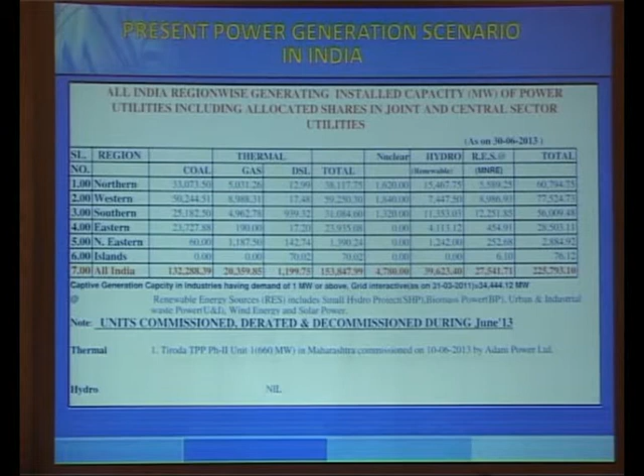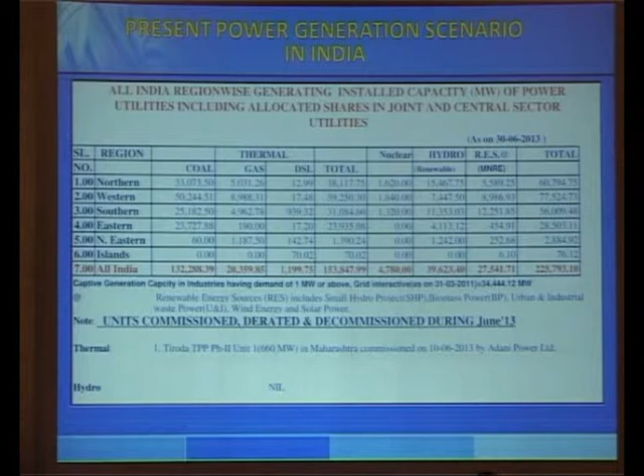That's the present power generation scenario of India. As you can see, this has been completely downloaded from the net. I will talk a little more over here. Once we just look at the total of thermal, all right? Now, if you take a look at that—and we did see in this particular thing, it becomes much more important.

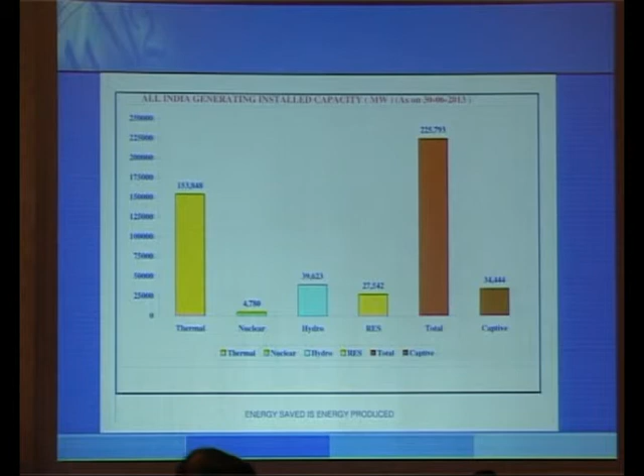Now, although our Shondipan Chakraborty, our speaker in the earlier session, talked about how renewables would probably try and replace non-renewables by the year 2030, I would tend to agree. We had a discussion over lunch—Arunda was there. I would like to agree more with what Mr. Alok Mukherjee had to say.

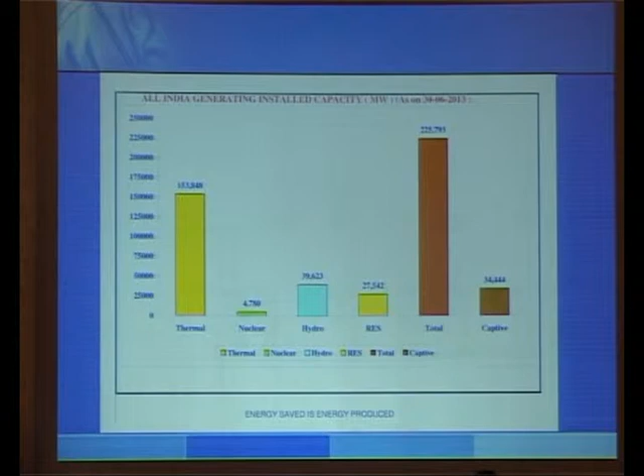If you look at this—this is not my statistic at all—this is the All India generating installed capacity as of current, 30/6/2013 is the date. And can you see the bars? This is thermal. The only additive I am adding here is that 90% of this is that great thing: coal. 90%.

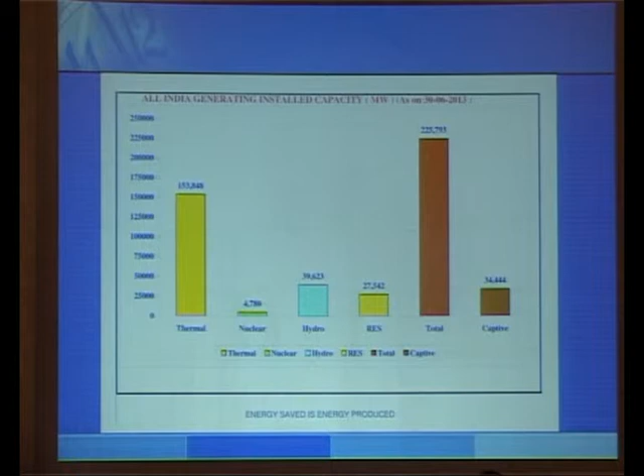And look at the others. This is stark reality. This is reality. And if we are going to dream of a utopia, neglecting this reality, then I think we are going to go wrong right at the very beginning. Yes, this needs to be enhanced. This needs to be enhanced. Oh, I don't know about this—Germany has banned this. This certainly needs to be enhanced, but this is reality, sirs, madam. So let's keep this in mind as we go forward. Otherwise, we will be skewed right from the very beginning. We cannot do away with coal, for God's sake. And we cannot do away with thermal, if you're in India.

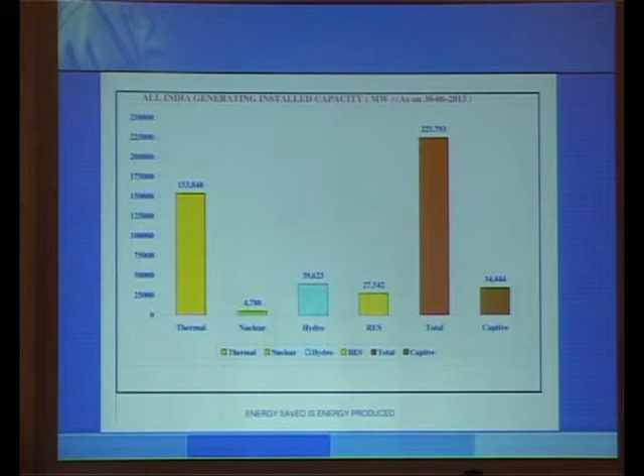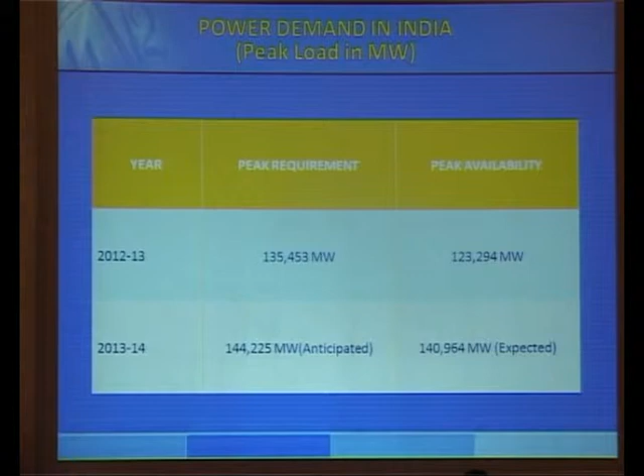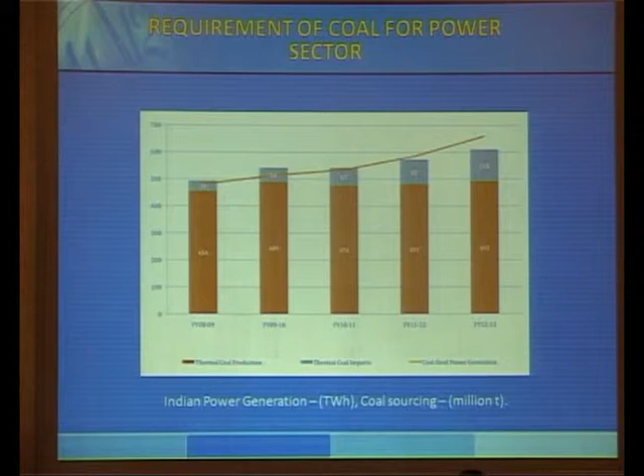I don't know why the Almighty really designed it in this manner, but it's true for India. Unfortunately, most of our rich mineral deposits are overlain by the richest of forests. It's true across many, many places and states of India. I may just want to pick out 2 of the 3 M's - Madhya Pradesh, Meghalaya.

This makes advanced technology as regards mining - I'm just stressing mining for a moment since I'm talking about reserves here of coal - it makes it imperative that we get into advanced technology as far as mining is concerned, principally underground mining. Because if you go in for open cast, you will be denuding the very rich medicinal forests at many places in Madhya Pradesh as well as Meghalaya if you want to extract the mineral below.

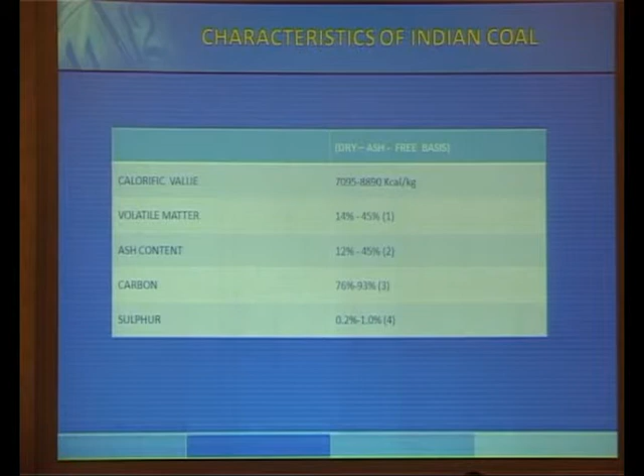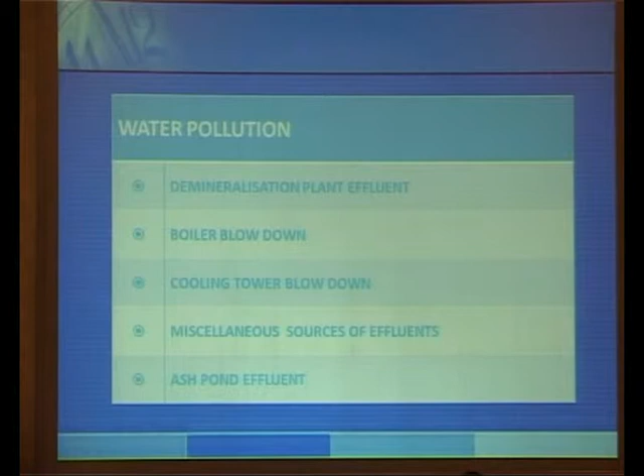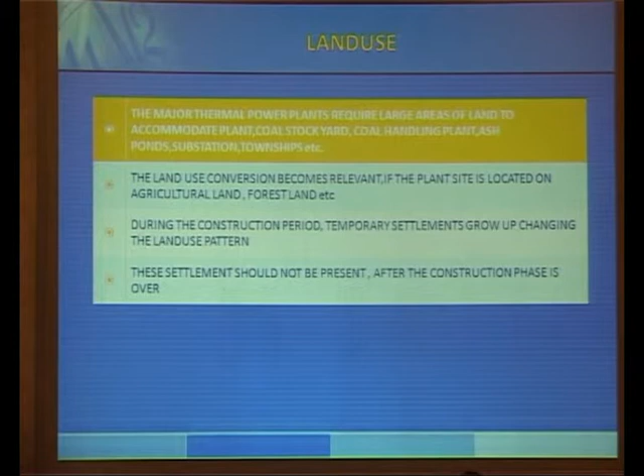Just a few major areas of impact that thermal power plants have on the environment. The land environment certainly gets disturbed. If it does, particularly for greenfield projects, then up comes rehabilitation and resettlement issues, which I think, in my book at least, takes the highest importance of all cardinal environmental parameters. Because here you're dealing with humans. It's as simple as that.

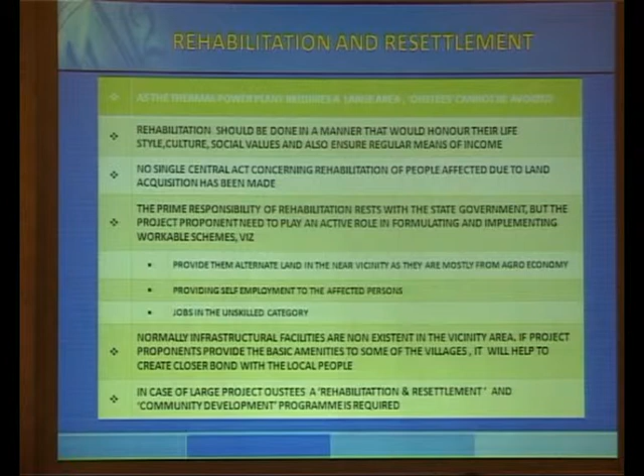I know of cases in large areas of power development where one family has been evicted 6 times. So poor has been the R&R plan.

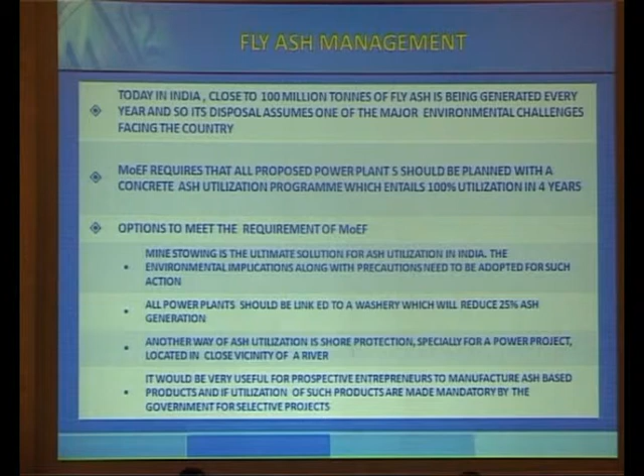We produce about 100 million tons of fly ash. We all know that we now have 100% utilization to be done in 4 years, as is the MOEF requirement. But I think all of you would agree we are far, far away from it. And if you ask me, this probably is the single most environmental problem that we face, at least in India today, with reality facing us - coal and its 45% ash and the fly ash it produces.

Mr. Mukherjee just mentioned that we are very adept in making policies, but very inept at implementing them. This probably is one such area.

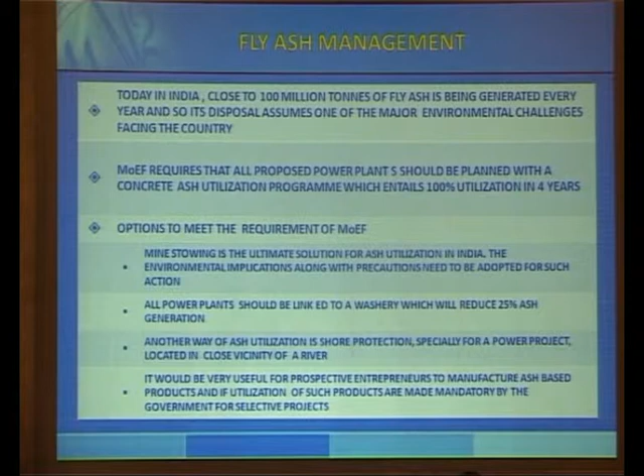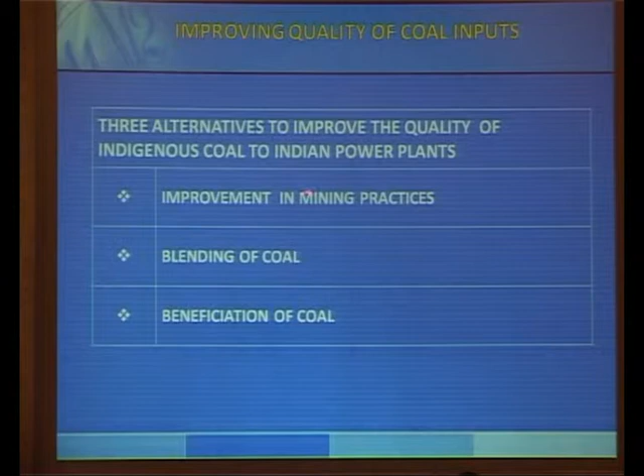I mentioned I will not go much into the mining part of it, the coal part of it, because I would like to stick to my topic of mitigation options in power generation. But just a few slides, because they are very interlinked. Obviously, blending of coal and beneficiation of coal leads to a certain amount of cleaning of coal, as was mentioned a while ago, that it's difficult. Clean coal is not the term to be used, but non-dirty coal or lower-dirty coal is a better term to be used. I accept it, but then this is some of the ways in which you can make the coal a little less dirty.

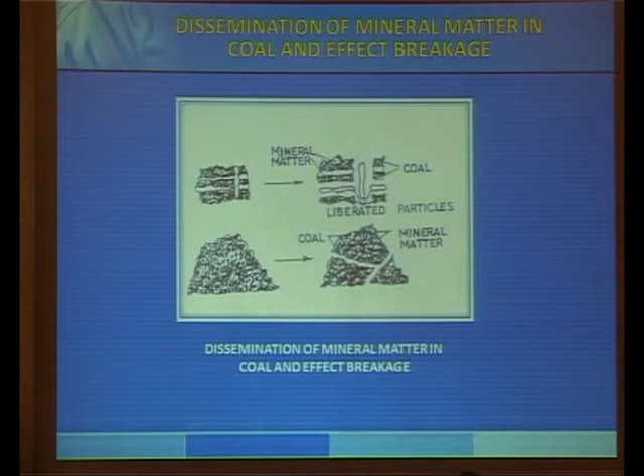Details of blending of coal. I think many of you are familiar with this. Beneficiation, one step higher. A small diagram showing how we break the mineral matter in coal and effect breakage. Very simple.

Advantages of coal beneficiation, we all know. It cleans up the gas. It cuts on solid waste disposal, obviously, because you've cleaned up the coal to an extent.

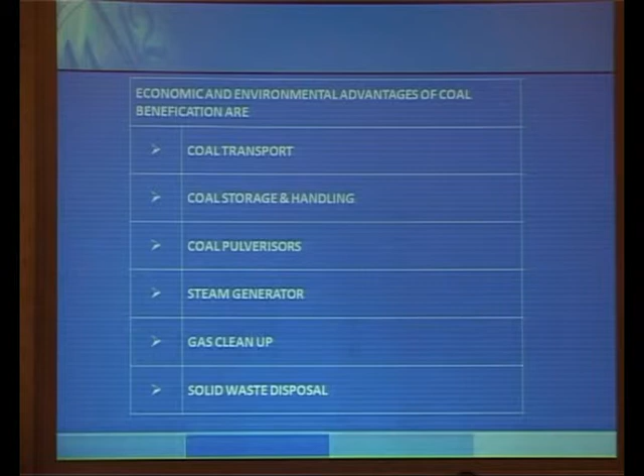Let's go into add-on type mitigative measures and how they work out. As I had mentioned earlier, we have particulate emission controls, and the three types are mentioned here.

You're all aware, and we are happy to state, that although our standard for particulate emissions for power plants today is 150 milligram per normal meter cubed, ESPs are being designed today which can bring it down to 100 or even 50 milligram per normal meter cubed. This is particularly true for supercritical thermal power plants. If you ask a Japanese operator - because I made this mistake of asking - going out of there is just steam and nothing else. So we are getting there.

That was Japan. But today, our properly functioning power plant with a 275-meter tall stack - if you look up, you will probably find almost no emissions to the naked eye.

SO2 emissions - we don't worry too much about this. Why? Because the sulfur content of our coal is very low, and our stipulation of stack height makes dispersal a major issue. So we don't need this very much today, unless you're importing coal wholesale from places like Australia or South Africa, where the sulfur content is 1.5 to 2%. In our coal, it's no longer a problem.

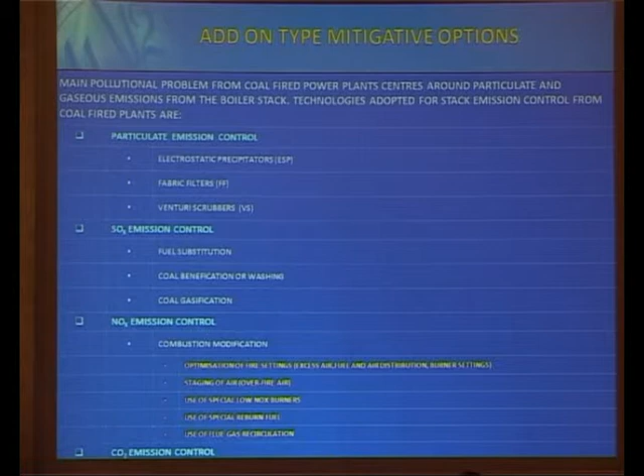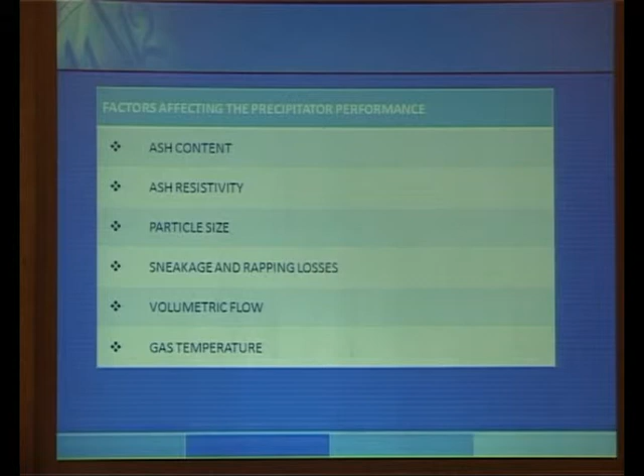The various factors that affect precipitator performance are, of course, all taken into account while designing them. These are details of the same. I said it would be technical, but I'm trying not to be ultra technical.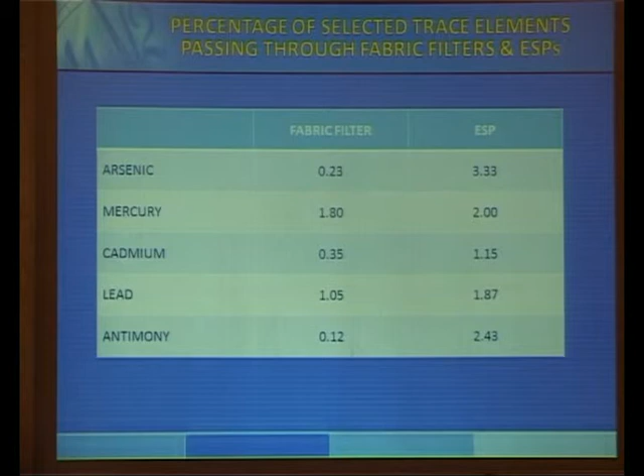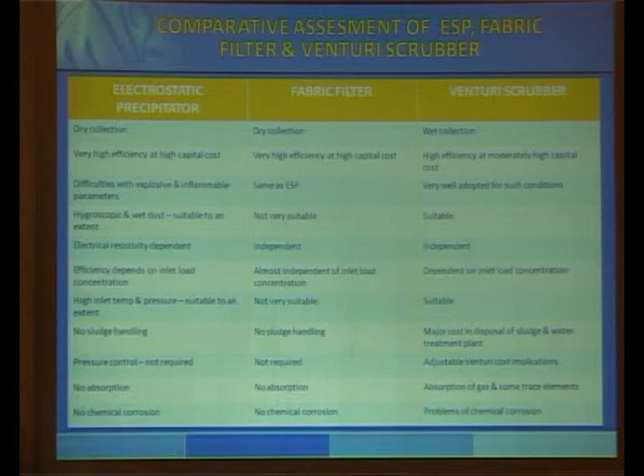A qualitative presentation here of the advantages and disadvantages, the pros and cons, between fabric filters and Venturi scrubbers. You will see basically that both are - the choice is up to you - but both have good efficiencies and good performances.

SOx. Let's go straight to this - if you have SOx, I only know of 1 or 2 power plants today which have installed FGD systems, the flue gas desulfurization plants. I only know about 1 or 2, not more than that, because it's not required in India at the moment. These are the different types of FGD systems you have.

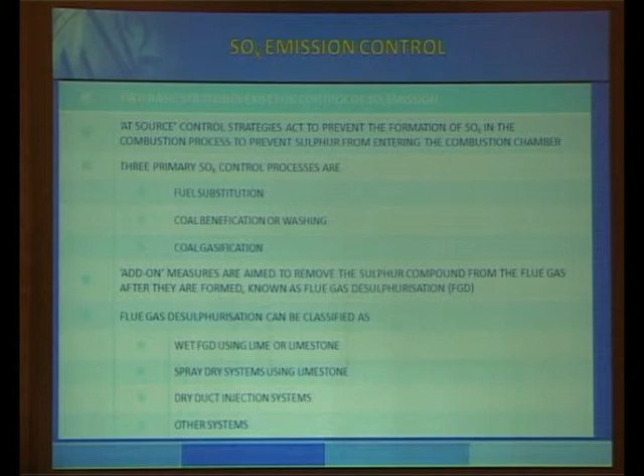But obviously, what MOEF today specifies is that you keep adequate space provision right behind your stacks or chimneys for retrofitting of flue gas desulfurization systems. If in the future the area or zone witnesses more development and the ambient levels of SO2 go above the threshold limits, you can use FGDs. But remember, an FGD system will cost you almost 20% of the cost of a power plant, which again gets plowed back to the consumer.

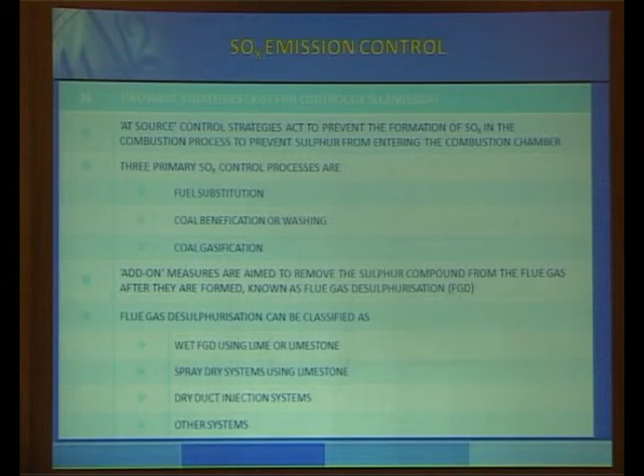Simple - this is how we basically control SO2 through stack heights. And remember that no power plant is allowed, however small it may be - 1 megawatt, 2 megawatt, etc. - with a stack height of less than 30 meters. That's the minimum.

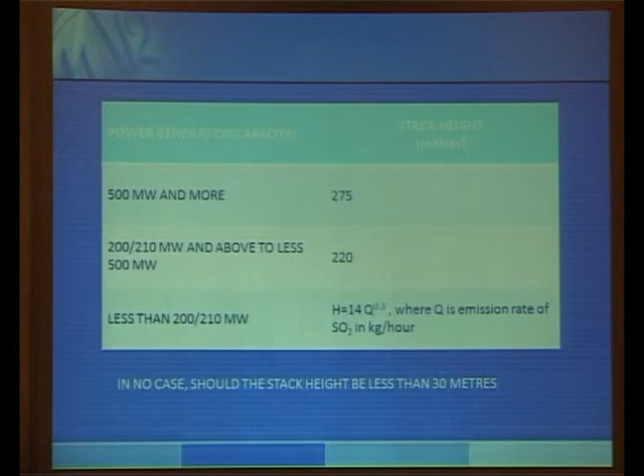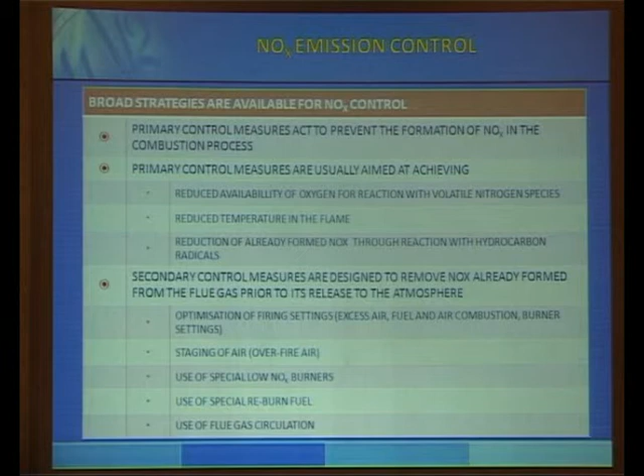NOx emission controls - the various types of NOx emission controls available today: primary control measures, that is at-source controls, and secondary control systems, basically by controlling your air-to-fuel ratio and so on. And of course, we have low NOx burners today for both coal and gas-based power plants. And that's the kind of efficiencies we are looking at.

I told you just a while ago that we are very much in this range. The World Bank standard is 400 ppm, and we have technologies today to reduce it to less than 750 milligram per normal meter cubed. That is equivalent to 400 ppm.

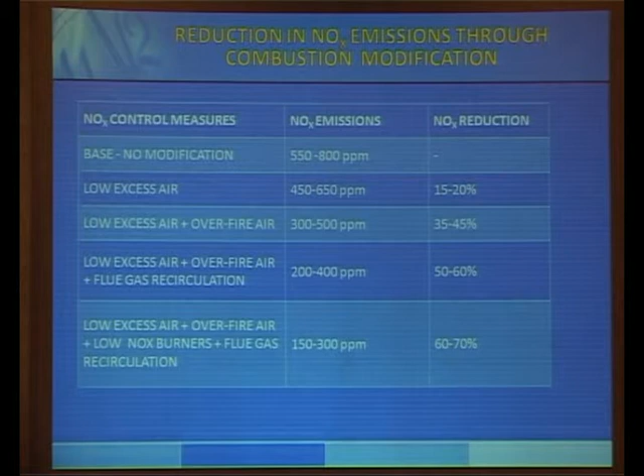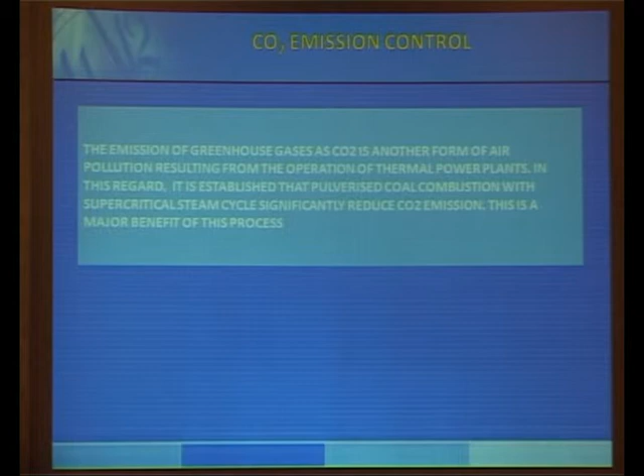I think this I'll skip because greenhouse gases we have discussed a lot in the earlier sessions. And if I open this up, I'll probably run till 6 p.m. straight away myself, which is also not desirable, Mr. Mukherjee.

Clean coal technologies.

I'm happy Mr. Mukherjee is not here. He would have asked me to change this to, what did he say? Not dirty coal technologies. Right.

This again, he had mentioned, without looking at the slide, we have moved from PF combustion today to supercritical. CFBCs have infiltrated us. We'll probably go into ultra supercritical. The normal combustion, PF combustion, gives a thermal efficiency of 37%. The supercritical is at least plus 4% more than that, with obviously enhanced environmental parameters.

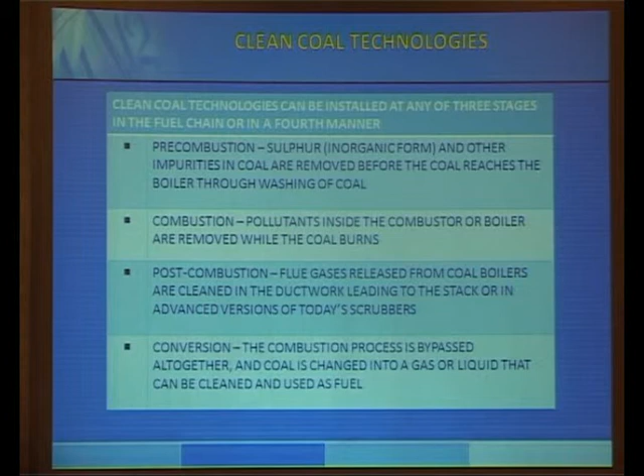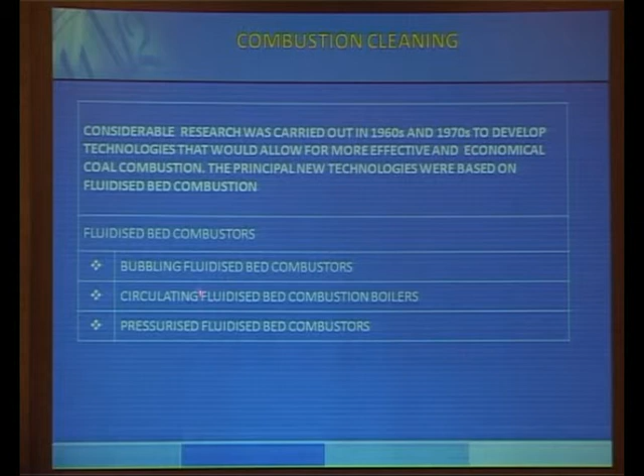PFBC and IGCC, of course, you will see costs attached to that, probably lie much ahead of us. That's exactly what I just mentioned. We have gone into this today, but we are yet to get into PFBCs. And IGCC is probably the last thing. That is probably what we might be thinking of in the year 2030. That's what I can see in front of me. Not doing away with coal, but probably moving to a system such as IGCC in 2 decades' time. Again, I stress, let's be realistic, let's be practical.

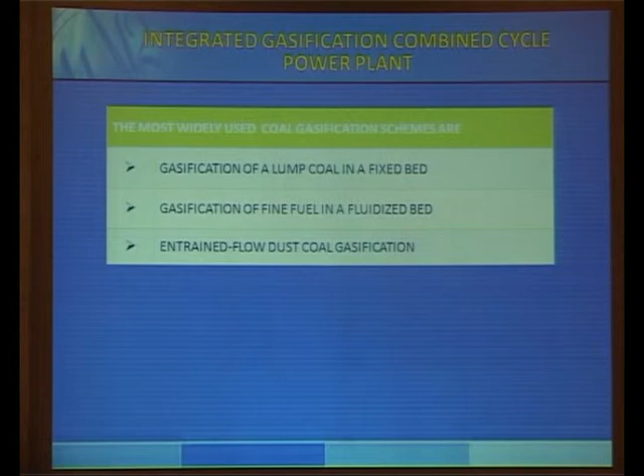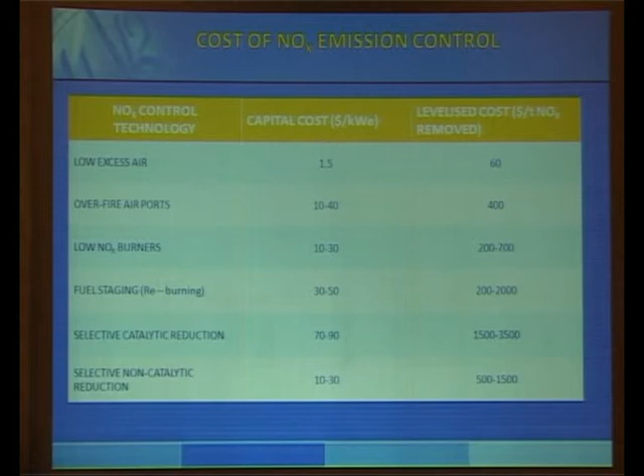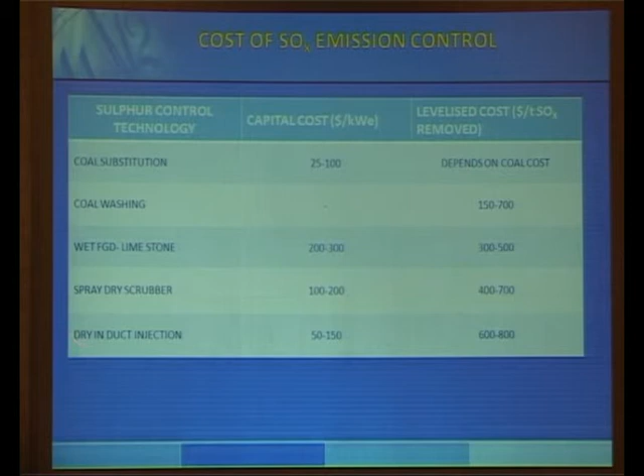Some just ballpark costs, and this is entirely of NOx control. As you can see, the higher that you get into technology, obviously the costs go high. The SCR technique and the SNCR techniques have the highest costs. Those are in dollars per ton of NOx removed. SOx emissions, and you can see the enhanced costs of various types of FGD systems. The different types of costs for clean coal technologies.

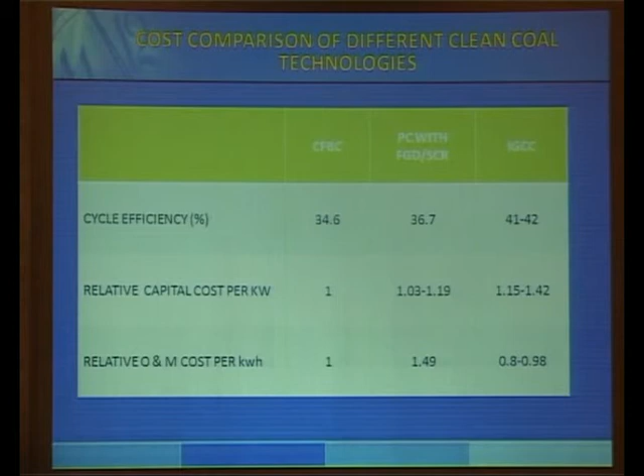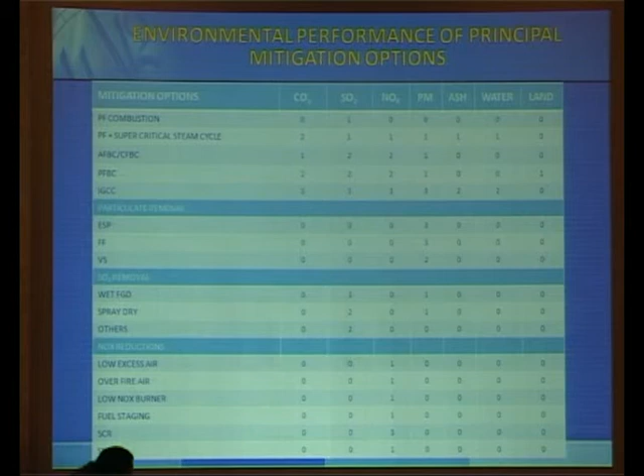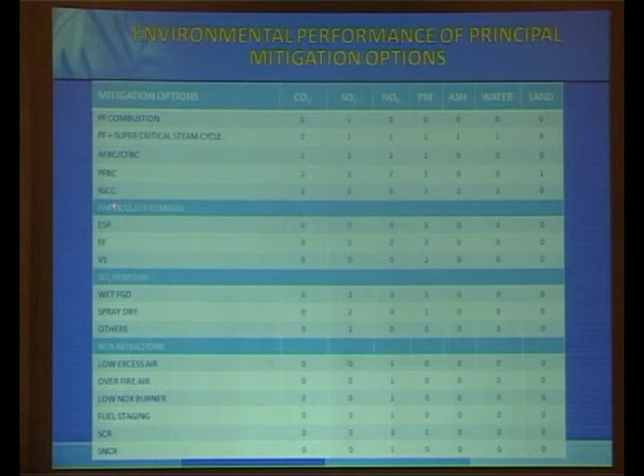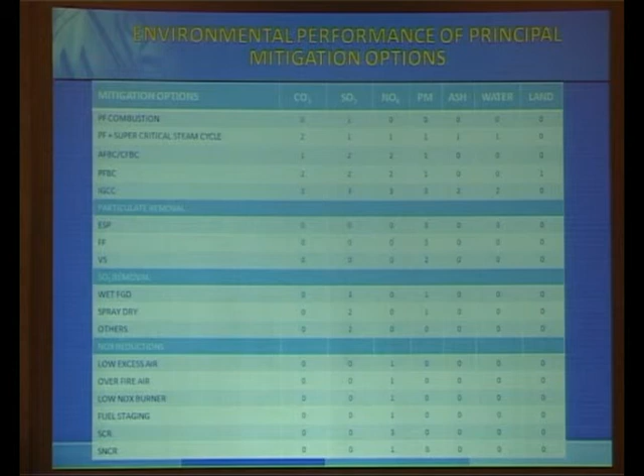This is just a qualitative matrix of various types of mitigation options. Environmental performance of principal mitigation options. You can see how we are moving and how various types of systems have. The more you go, look at IGCC, it's got 3, 3, 3 across the line, instead of PF combustion, which is almost zeros across the line. So we are somewhere right now still in the first 2 columns. And as I said, hopefully, over the next 2 decades, we'll try and come down this particular column from here to somewhere, at least here, if not wholly here.

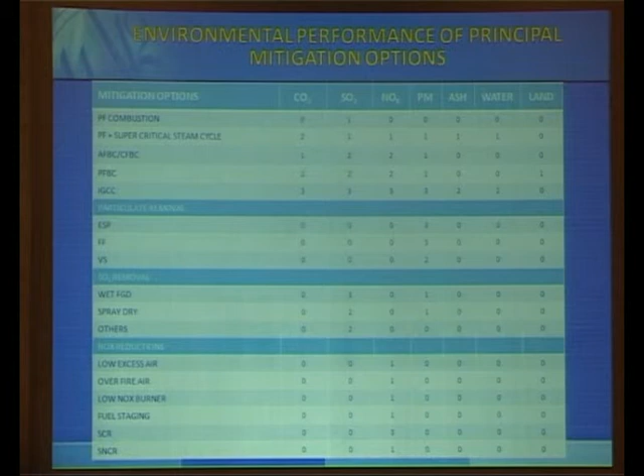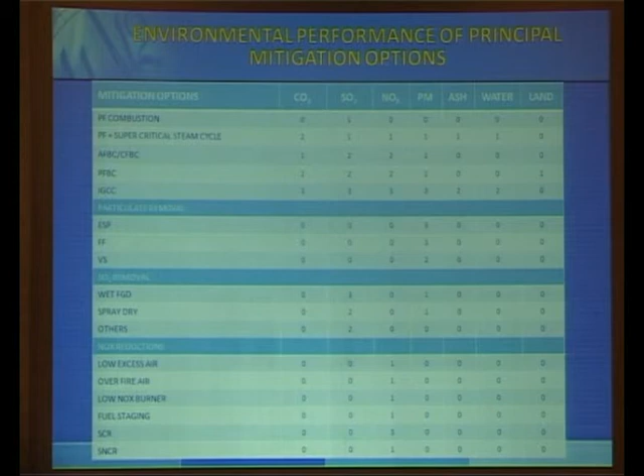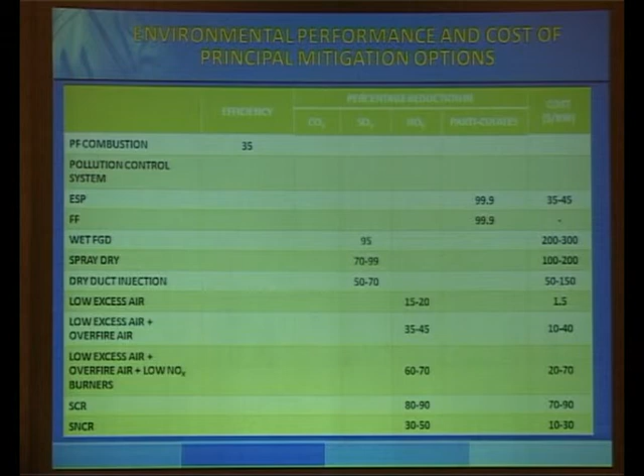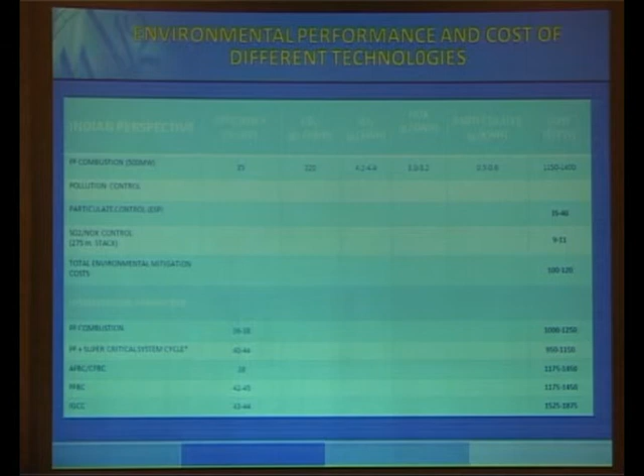Because the more advanced technologies you get, the more at-source controls you have, and your quantitative environmental matrix improves constantly. These are, again, cost figures of various types of mitigation options. These are in dollars, again per ton of pollutant removed. And finally, environmental performance and cost of different kinds of technologies. Obviously, you will find, again, the costs of things like PFBC and IGCC way more than other technologies.

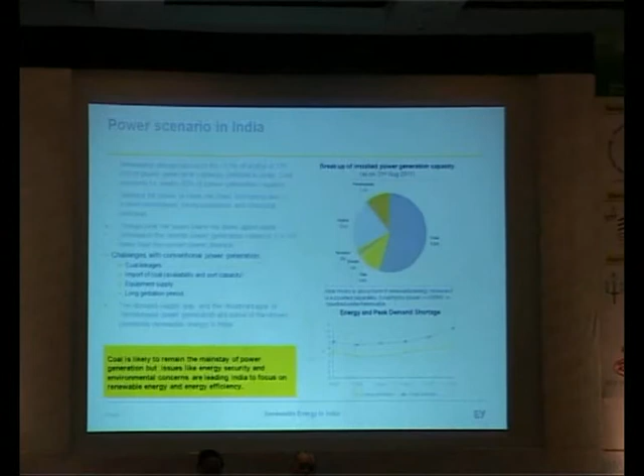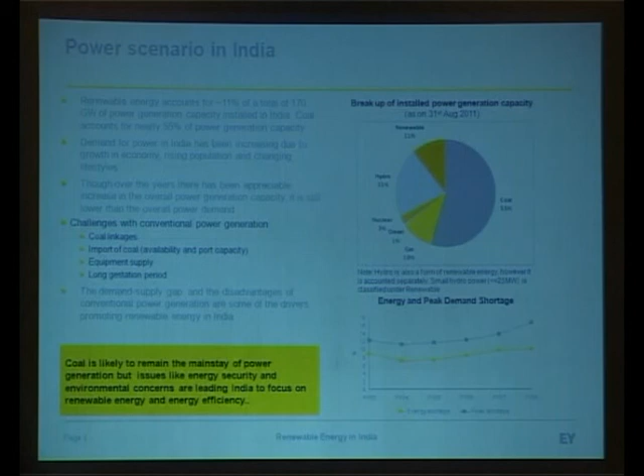Even in the 12th plan, which is between 2012 to 2017, the power generation capacity is expected to increase by another 64,000 megawatt. But at the same time, the power sector has been facing many challenges. Challenges in terms of fuel sourcing or fuel constraint, challenges in terms of fuel cost because of the rupee-dollar ratio, the imported coal cost has been significantly increasing. We have challenges in getting regulatory approvals because nowadays the approvals are getting more and more stringent. We have challenges in land acquisition. We have limitations in terms of domestic EPC players in the power market. We have water-related issues, water scarcity. There was a World Bank report which clearly indicates that the thermal power capacity